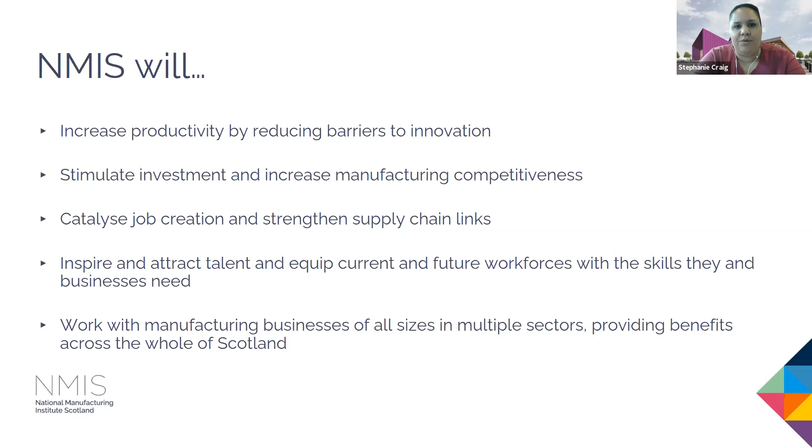NMIS as a group, I won't go into much detail about that, but we do have currently open and live two specialist centres, of which one I'm sitting in just now, the Advanced Forming Research Centre, and the Lightweight Manufacturing Centre at the Westway in Renfrew. The core elements of NMIS will involve a digital factory, a collaboration hub and a manufacturing skills academy. You can always reach out if you want any more information regarding the NMIS group.

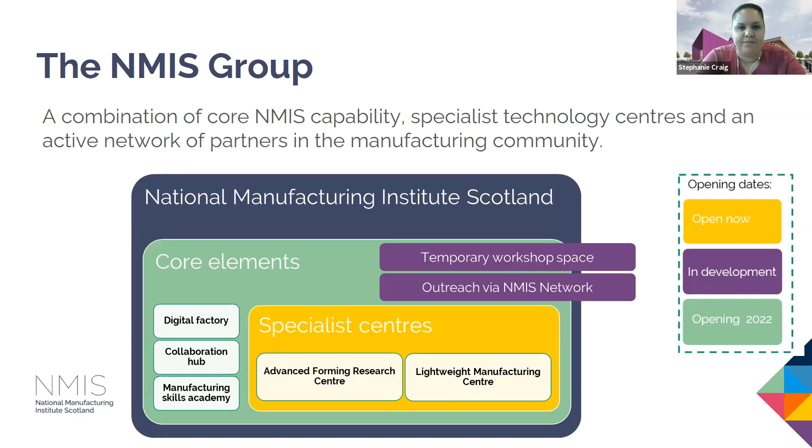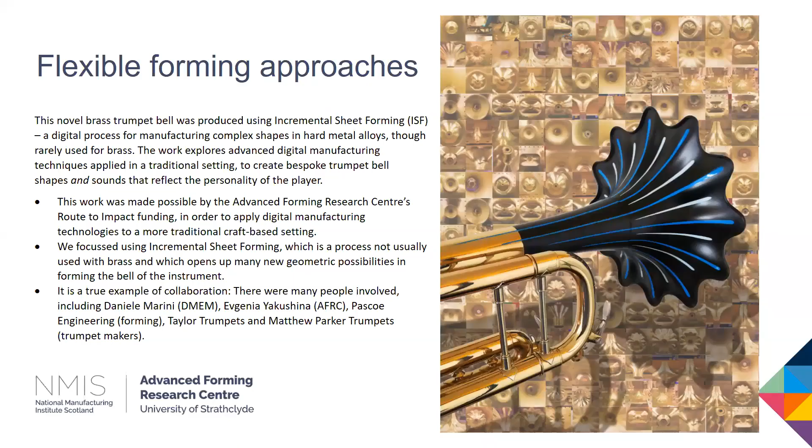If you can let me know that you can see my screen perfectly. Yes. It started from the very end. Is it the same like I see it? Yeah, you need to go back to the start. Yeah, great. That's the proper start.

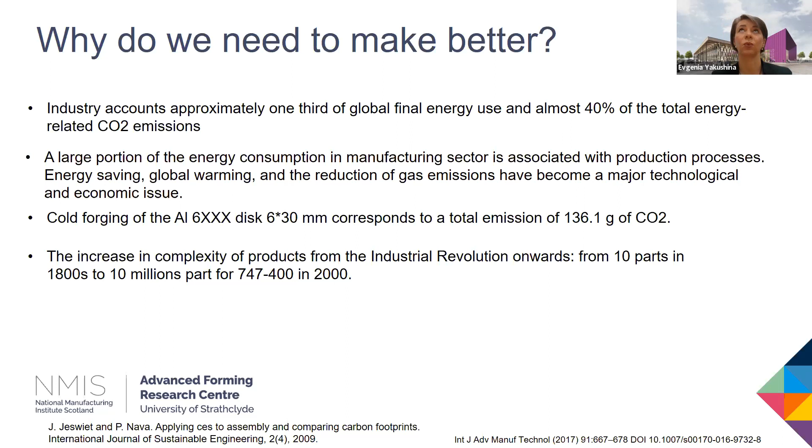And another factor, obviously speaking about the Industrial Revolution, is on the screen as well. In the 1800s, we had a musket which contained only 10 parts. In the 2000s, we've been speaking about the 747, which contains 10 million parts, and this progression keeps growing. So this is the motivation. Why do we need to make it better, and not just start, but actually do it right now?

To give you the flavor of how and what we do in the forming team to make it better: as you can see, the forming team is comprised of 4 themes, and we cover a really broad range and variety of forming processes. This relates to hot or cold sheet forming. Obviously, tribology, coating, and friction questions are considered as well. And the most efficient procedure is process modeling.

With regards to the particular steps, we work in very different strategies and directions. Either it is improvements of the current manufacturing process, which will then be embedded into supply chain effectiveness, or in parallel we explore new opportunities from innovation. And this brings us to the next level: how we can link state-of-the-art manufacturing technologies to business challenges and product challenges.

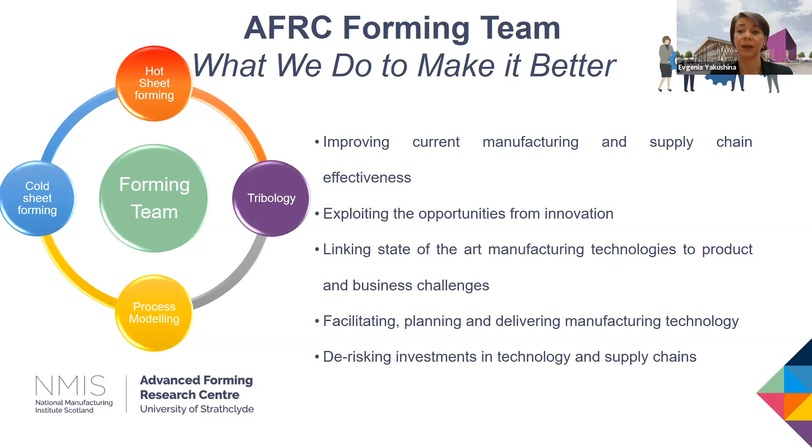Through that, we are facilitating, planning and delivering manufacturing technology. But the very last and very important step is how we can de-risk investments in the technology and how it could be implemented into the supply chain. So the next question, starting from why and what, is how we can make it better. That's a quite developed, very classical, but very proven scheme, I would say.

First of all, it is understanding the material. There are different types of inquiries coming from customers. Either they would like to optimize the current products and current material, or implement a new one, or nowadays they are all asking how they can have a stronger material or make their part lighter. So all this brings us to the very first stage, where the material is characterized and this information is embedded into finite element modeling.

But we always say we need to understand the requirements for your tool and process. We have a brilliant example where a customer came to us with a hot forming inquiry and said, I would like to form this part at the highest temperature and I will have brilliant formability. That's right, but what is going to happen with your tool? After 100 parts, the tool will deteriorate and you will need another expensive one, manufactured from the very beginning. So this is where we say we need to bring understanding to you about the tool and the manufacturing process.

And the final stage is optimization. When you're clear about your material selection, when you know what is your tool and how you can optimize, and what will be your process, that's a brilliant opportunity through modeling and different assessment exercises to optimize it. That's where we could either walk through the line with our manufacturing engineers and pick up every single stage which could be optimized or which needs to be validated, or where the quality needs to be improved. And in parallel, we could assess what other alternative manufacturing options could make it better.

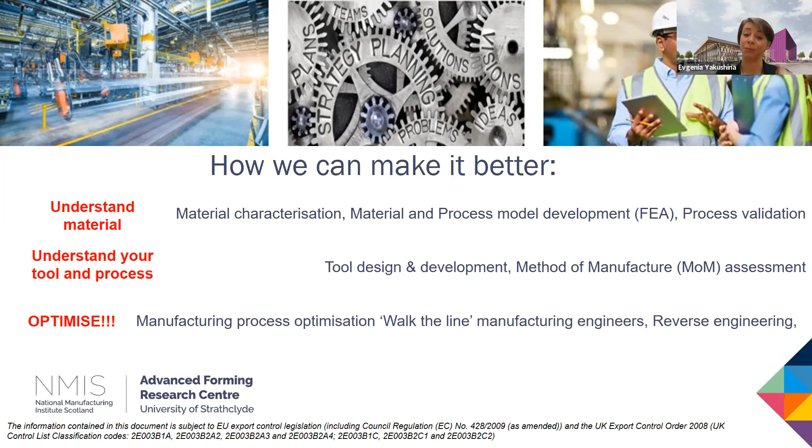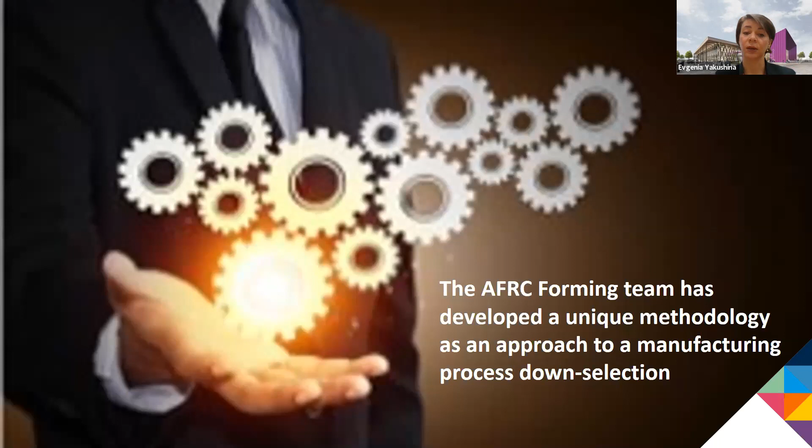Another very important part of my presentation will be dedicated to the unique methodology that has been developed in the forming team of the Advanced Forming Research Center. It is actually about manufacturing process down selection. On the next slide, you can see it's very simplified, but I like when simple templates and concepts bring it up to attention, because it leads us to start from very good questions and then dig it out to the very fine level required by the customers or by the challenge itself.

So for us, it doesn't matter where we need to start. Some customers come to us with brilliant ideas and say, this is the sketch of the part which I would like you to develop the full manufacturing process for, and it will be a turnkey solution. That's fine. Either it's an inquiry that I would like a new design of the part, so it's either part optimization, or you've got new features and then thinking about the process that could manufacture this advanced design.

Or the nowadays requirement is a stronger material. I would like that material to be stronger. I would like that material to be formable at the same time and lighter. That's a brilliant combination, which is really challenging from the material science point of view. But all this actually targets one question: how we can develop the optimized manufacturing technology and make the overall concept better. The process is named methods of manufacture assessment.

So there are 5 main steps which need to be undertaken on the high level, which actually bring you to the stage where you will understand what is the optimal manufacturing process parameters and how we can achieve it. So let me guide you through these stages.

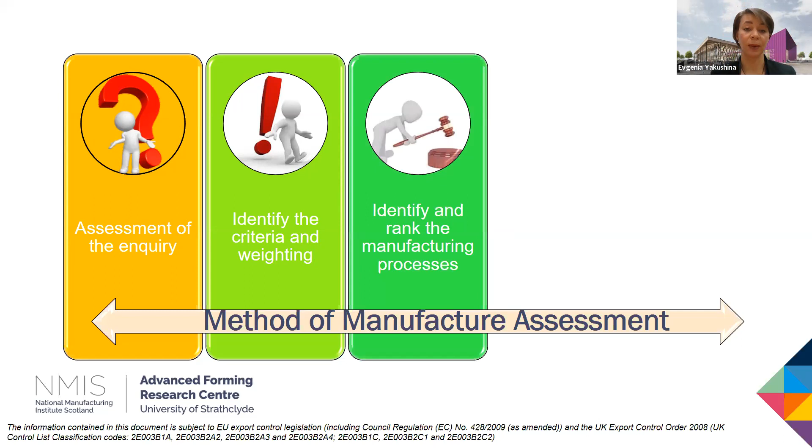And then from the whole variety, from the selection of manufacturing processes, we can rank them and identify who will be the champion. Usually we are selecting 2 or 3 of them and saying these are the viable options, taking into account your criteria, the weighting parameters, and the material that has been down selected.

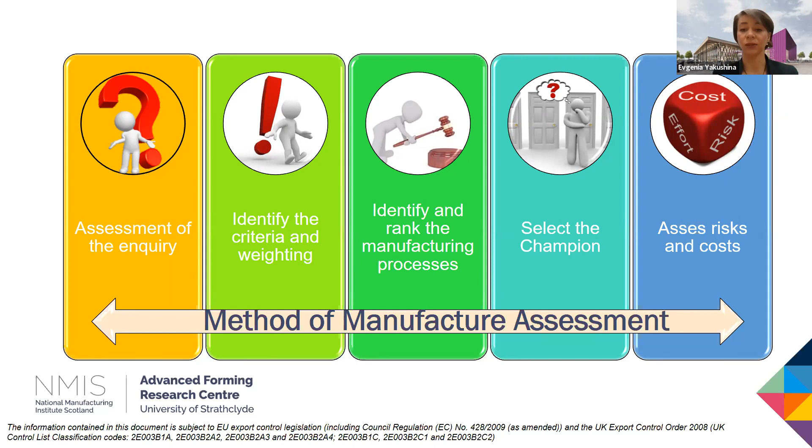And the final and very important step is assessment of the risk, cost, and effort. Because actually the manufacturing technology could be brilliant—it will form the part ideally, the quality of the part will be consistent—but the cost of the part will be the criteria that wouldn't let you go for this option, for this manufacturing route. And therefore, the final stage actually tells you that if you're going for the optimized manufacturing procedure, such and such, you need to manufacture 1,000 pounds in the month. Otherwise, the part will be almost like the cost of gold.

And that's very important—to understand all these risks, costs, and effort which will be required from the customer or from the supply chain that needs to support the manufacturing process.

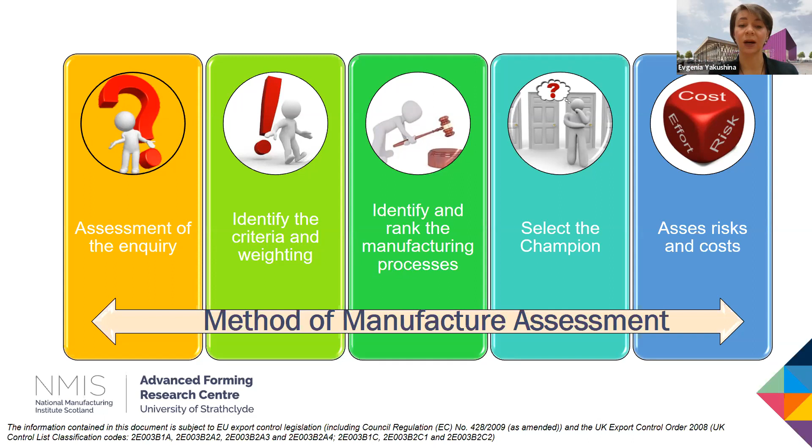So this was the theoretical introduction part, but let me show you on the case studies how we are doing this, how we are making it better.

The next few case studies will be from our very own tier 1 partner, Rolls-Royce. We've been working on a very resource-requiring process, the superplastic forming. It is known that this process is used to manufacture hollow wide-chord fan blades, particularly for aerospace jet engines. And it's not a secret that it is long, hot, and expensive.

Rolls-Royce came to us with an inquiry about whether there are any opportunities to optimize this process. Either we need to put another SPF press in order to increase manufacturing capabilities, or there are other ways.

So what AFRC did was work on extensive data mining of many years of Rolls-Royce manufacturing data. We went through all the data analysis implemented at the Rolls-Royce manufacturing facilities, then analyzed the SPF cycles across multiple stages, going through every single step of the process, and then developed novel temperature measurement instruments.

At the end, we have a brilliant achievement. The direct result of the project was that a new SPF inflation curve with a 27% reduction in cycle time was identified, and it was validated in production trials at the Rolls-Royce facilities. That was a very good result.

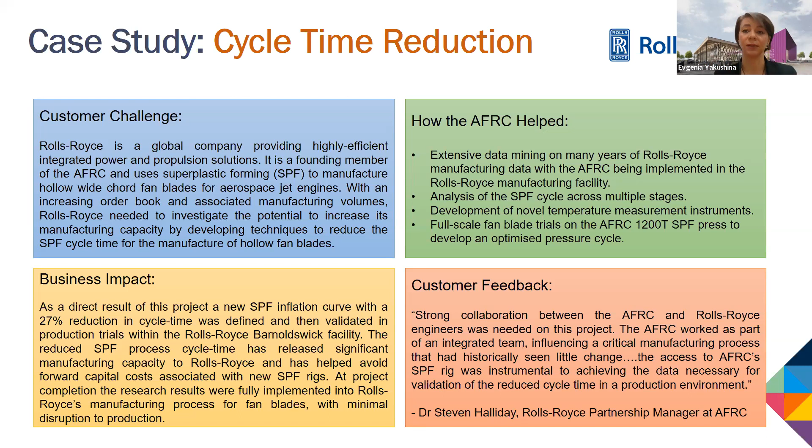The next example is again about how we make it better for Rolls-Royce, and that's about another side of the SPF process. Obviously protection coating is a must, and boron nitride is a water-based coating commonly used to provide lubrication for superplastic forming processes. Usually it's applied manually, and you can imagine the variability depending on the operator, on the humidity condition, how much is applied, and so on.

And what does that mean? This variability influences part quality and die wear, and sometimes it could even require die refurbishing and part post-processing as well.

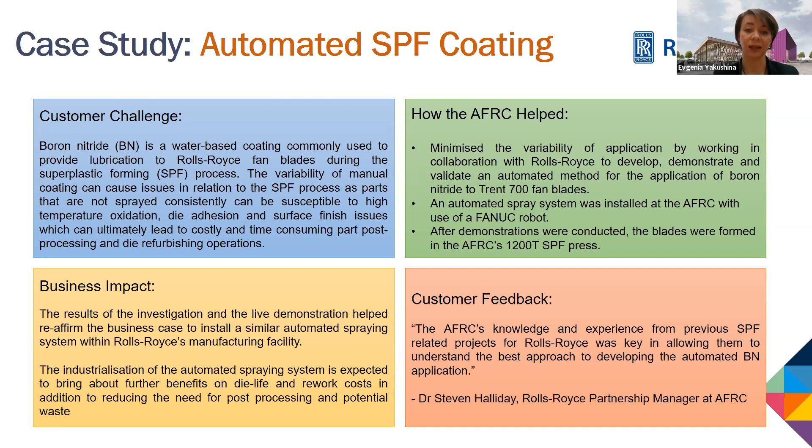Therefore, Rolls-Royce came to us and asked how it could be optimized, how we can make the quality better and more systematic. Engineers at AFRC developed automated spraying facilities, very delicate and efficient at the same time, which allow us to improve die life, reduce costs, eliminate the need for post-processing and potential waste of material, and let the dies, which are a substantial cost for SPF tooling, live longer. Brilliant results—Rolls-Royce was happy, and so are we.

Hydroforming is the technology I'll be talking about for the next couple of slides, and again it was a brilliant example performed in cooperation with Rolls-Royce. Hydroforming is a manufacturing process where high-pressure hydraulic fluid is used to form the material, and it is usually applied for manufacturing and forming low-strength steel and alloy parts.

But what was the challenge that Rolls-Royce put in front of us? It was how we can challenge hydroforming technology versus superplastic forming—whether there are economical and financial benefits, and how it could be used for forming complex shape parts. So what we did at AFRC, at the first stage, was go through the cost modeling technique, one of the services explored in the forming team.

The modeling technique compared hydroforming against existing methods of manufacturing. As soon as that was proved, we went for material characterization data and then generated the finite element model.

As soon as the model was developed to represent the hydroforming process, we aimed to manufacture the parts and go for trials. This helped us validate the model and the physical process that had been carried out, and we were able to produce defect-free parts with challenging geometry features and form. So that was the whole process, starting from the simple question: can this forming technology actually be used as an alternative?

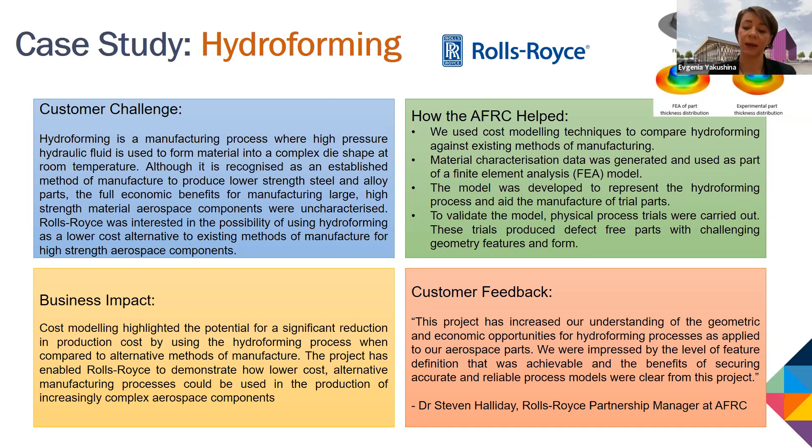So can we make the technology better to manufacture complex shape parts? The next example is again about hydroforming, but another overview. We've been speaking about strong parts, but customers are now driven by a buzzword, which is lightweighting. So we start looking at whether this technology can actually support lightweight materials.

We've been working on the hydroforming of magnesium, and it proved that it could be called a cost-saving technology. In this study, the cost comparison showed up to 40% cost savings could be made to produce these complex shape components. The picture on the left-hand side shows a component comprising a lot of features and radii in the central area, and it was perfectly formed, damage-free, with quite satisfactory quality. Again, it was a way to show how we can improve things compared to a very resource-requiring technology from the point of view of hydroforming.

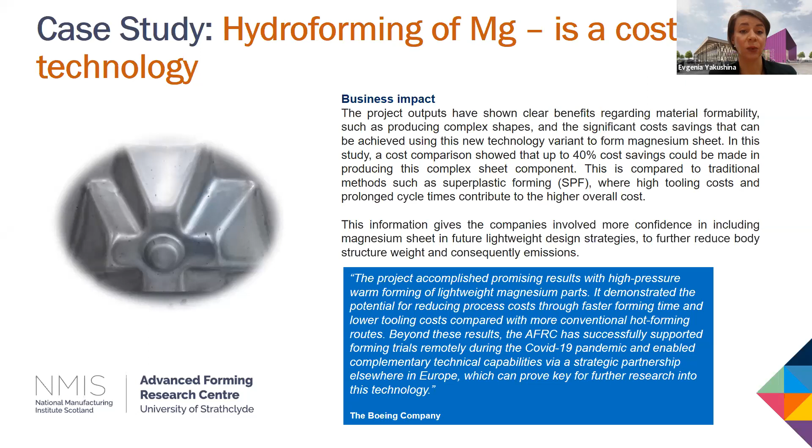This case study proves that the design developed through CFD analysis can convert up to 80% of the river's energy to electricity, and it's anywhere between 10 kilowatts and 1 megawatt. To give you a feeling, the solar panels we have on our roofs produce about 4 kilowatts, so that's a quite highly efficient process.

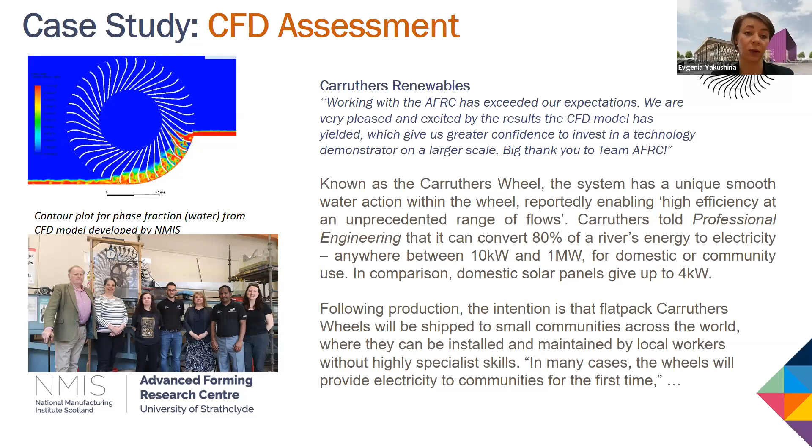Another advantage is the simplicity of the design. The dimensions of these constructions allow simple local workers in small communities to install it without any highly specialist skills. So it could be a win-win solution for these types of applications.

Another approach, which is actually putting us towards flexible manufacturing, is a flexible tooling approach. That's where AFRC has been working in collaboration with Ford, Gestamp, and other SME companies. The idea is how the same part made of different materials could be formed in a single tool, and that's the representation of the scheme showing how the concept could be developed.

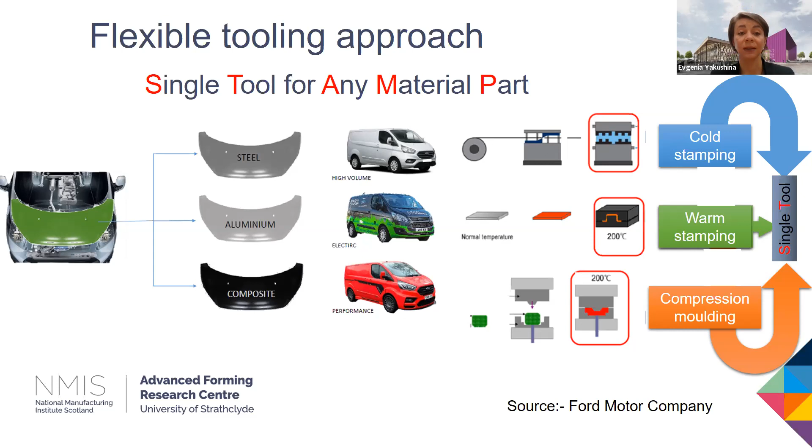The last couple of slides will be dedicated to a process that's very flexible, innovative, and still largely unknown: incremental sheet forming. This case study challenges cold forming versus hot forming - can you cold form titanium? The answer that the AFRC team gave was yes. We actually formed titanium parts at room temperature with an overall forming depth of 100 millimeters, which was an absolutely amazing result for our partners.

What this gives us is it helps shorten the time to market, because ISF technology is very simple - you need a CNC machine, you need a forming tool, and that's actually it. You obviously need to develop the tool path, but that could be done by a skilled technician. Next is a reduction in production cost and energy usage, because it's done at room temperature. You don't need to spend a lot of time manufacturing complex dies. There's no material wastage and none of these parameters associated with the process. At the end, you obtain desirable parts in small series, which is sometimes a requirement depending on the application.

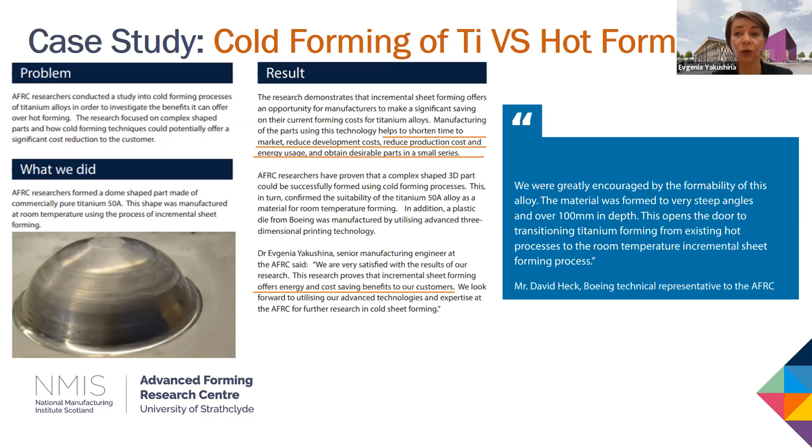Another beautiful example of how ISF could be applied for manufacturing not only aerospace components but for medical applications is a cranial implant. It's obvious that we are all different, and we have different structures of our skulls. Therefore, when unfortunately such parts like cranial implants are required, they should be individually manufactured - it couldn't be mass production, it should be tailored for the patient. Incremental sheet forming technology is exactly a process that allows you to have this flexibility.

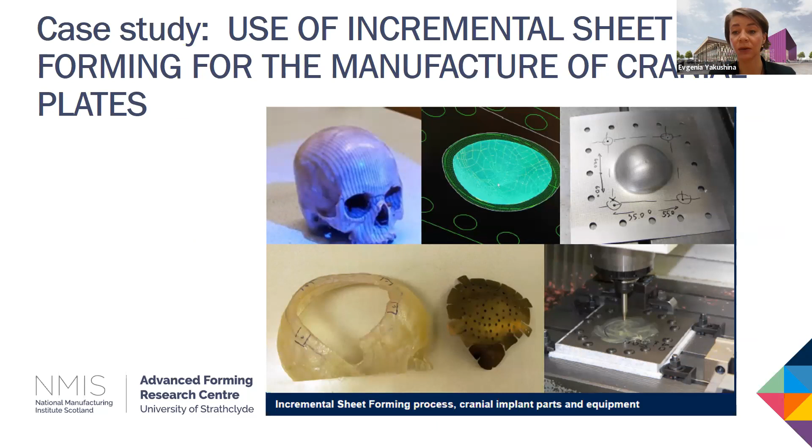The final note of my presentation is how incremental sheet forming could be applied for manufacturing musical instruments. This work has been done in collaboration with Taylor Trumpets and Matthew Parker Trumpets, who are both trumpet manufacturers. Usually the trumpet bell is a part that's manufactured manually, and you could imagine it really depends on how skillful the manufacturer is, or it's just wastage of material. The AFRC team, in collaboration with Pascoe Engineering, manufactured really fancy shaped trumpet bells, and you can see one very beautiful example on the screen.

So that's the approach for how we can make different manufacturing technologies applicable for a really broad range of components, whether aerospace, medical, or even musical applications.

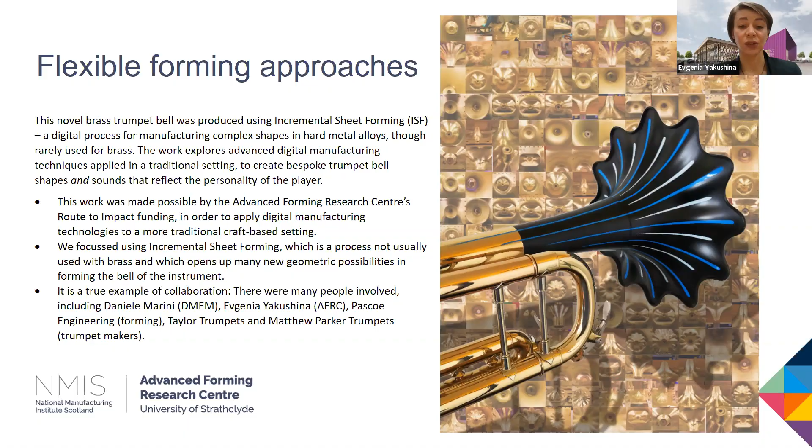And to finalize my presentation for today, a very quick slide on our vision and development plan. You've heard this word from me quite a lot today: lightweighting. We are working on how we can develop hybrid lightweight materials, and how we can make the forming technologies flexible to make it better.

Resilient UK manufacturing: the hot forming technologies, which will be on the market anyway, will be associated with oxidation, and we are working on the development of structures to optimize this.

Taking into account that new manufacturing processes are complex, we are manufacturing complex shaped parts. Tested methodologies, which give us a classical representation of material data, don't always fully answer questions of material applicability for forming strategies. Therefore, we need to maintain the same pace of development in testing technologies as in manufacturing. And the last one, but not least, net zero resource-efficient manufacturing.

That's where we are speaking about hybrid processes - resource-efficient manufacturing for high strength materials, which is a requirement. We need high strength, and we are working at the highest temperatures. And obviously, if we are speaking about the hot forming process, how alternatively we can make the heating better. That's me for today, thank you very much for your attention.

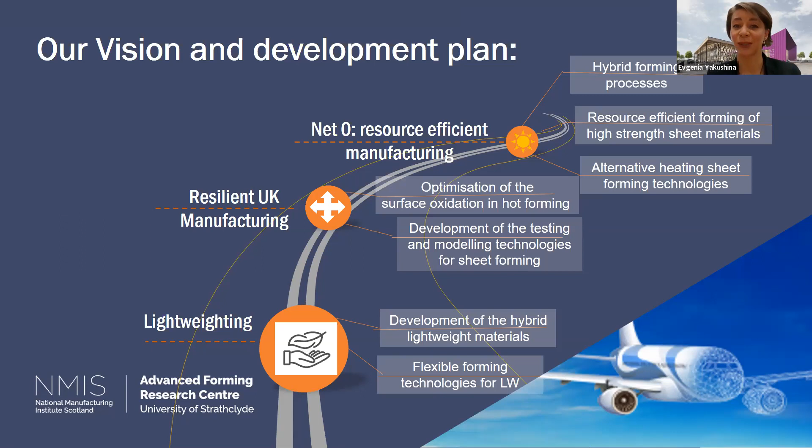Thanks, Evgenia. Hi everyone, my name is May Hicks. I'm going to give you an overview of incremental forming of metals at the AFRC. I sit within the Forging and Incremental Technologies team, which is very much complementary to Evgenia's team and the work that they do in the forming team.

We cover all aspects of forging and incremental forming, which covers both bulk and plate material forms. In terms of the processes within our remit, we've got 5 primary technologies in near net shape forming, which is flow, shear and spin forming, rotary forging, and radial forging.

Within this, we cover a range of different material applications, including but not limited to those on screen now: steels, nickel alloys, aluminium, titanium and coppers. We also work with development alloys and new alloy applications. These technologies are very much cross-sectoral, with applications in automotive, aerospace, energy, and oil and gas, as well as others. We support a number of SME partners within the UK and abroad, as well as OEMs.

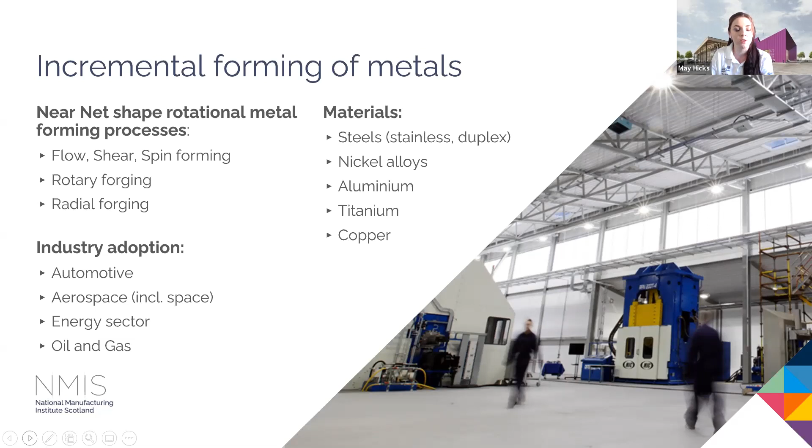Just to give an overview of some of the technologies: in flow and shear forming, the aim is to create near net shaped surfaces with optimum use of input material. We've got two primary machines within the AFRC at NMIS where we perform these technologies. In lieu of a visit around our shop floor, here's some video footage showing the processes in action. On the left here, this is flow forming.

In flow forming, we're starting from a forged and machined preform. This is a bulk forming process, it's cold, with no heat added other than that induced by friction. We've got 3 rollers here which are incrementally deforming the material, so the contact point is continuously shifting. This means the material is plasticizing, allowed to flow, and we can achieve high deformations with much lower forming forces than conventional methods.

In this process, we can achieve upwards of 200% elongation on cylindrical forms, with anywhere between 20 and 80% reduction in thickness. A key benefit compared to machining, for example a shaft type structure from solid, is that there's a huge amount of material wastage in machining. In this process, you can get much nearer net shape. Many of the dimensional features can be left as formed, as can the surface condition, which is equivalent or better than machining in many cases.

A key benefit of these types of technologies is that they are well suited to difficult to form materials that normally require heating or very high forming forces. Because of that incremental mechanism, it can lend itself well to these difficult to form alloys.

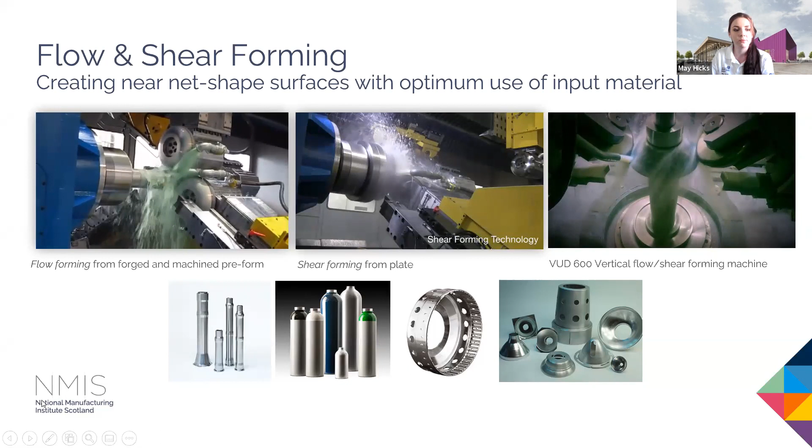So again, we're getting that reduced requirement for force, forming at much lower forming forces, but able to create much more complex features. We've also got the flexibility of the 45-degree nutation, where we can create as severe a deformation as a 90-degree flange, cold formed onto a tube structure, which would conventionally be, for example, welded onto a standard tube part. So much like some of the other technologies, we're reducing the number of parts required, reducing post-processing steps, and able to create near net shape in a single input.

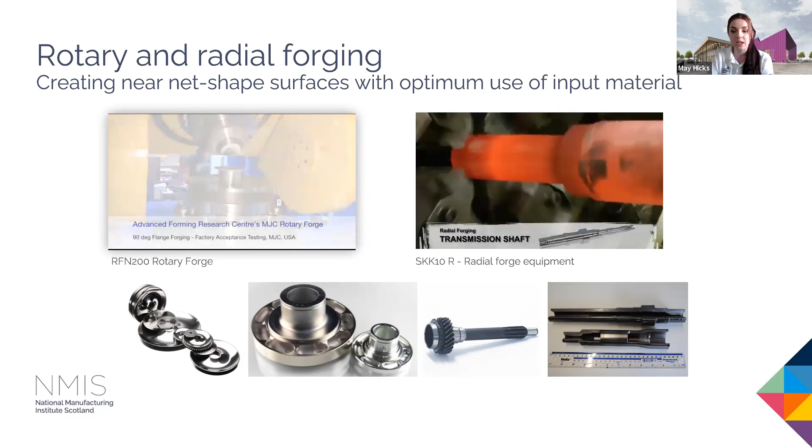It can achieve very severe levels of deformation and elongation. It's got inline induction heating within this cell, so it really does offer a turnkey solution from input billet through to forged part. A key advantage of this particular process is that you can create internal features. You can see in some of the examples there that we've got internal splines being created near net shape.

For things like transmission shafts in the automotive industry, this is hugely advantageous. The internal steps on the part are also a key advantage. You can imagine these are difficult to machine, particularly on larger components, and it is a primary advantage of radial forging.

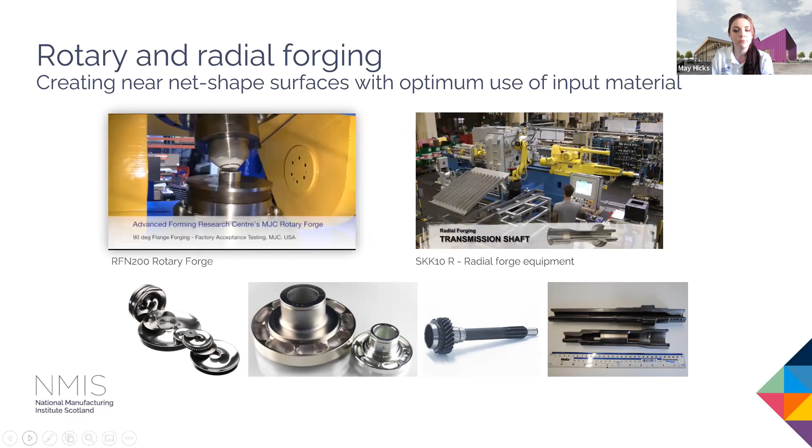In terms of the research and development work we do, how we make it better is by understanding the process first and foremost. We've spent 7 years plus in near net shape forming at the AFRC, understanding everything from raw material input and how that impacts the process, but also what the process can give us in a final part, through understanding the geometric and mechanical possibilities.

A key part of our work is to bridge that gap between design and manufacture, having enough process understanding that we can inform new part design, how to design better for these more novel technologies, and try to break that norm of inefficient legacy processes that always seem to be the baseline method to manufacture. Things like what Evgenia touched on in the method manufacture assessment, these are also where we would input the knowledge of these processes to get a more effective solution.

Just in summary, across the processes we've described this morning, they are net and near net shape processes. Material utilisation has improved up to 80% compared to forging and machining operations. It is a chipless process, so in terms of cost efficiency, it can be hugely beneficial. Mechanical properties are generally improved, and that's everything from fatigue, the hardness of the material, and also getting that grain refinement.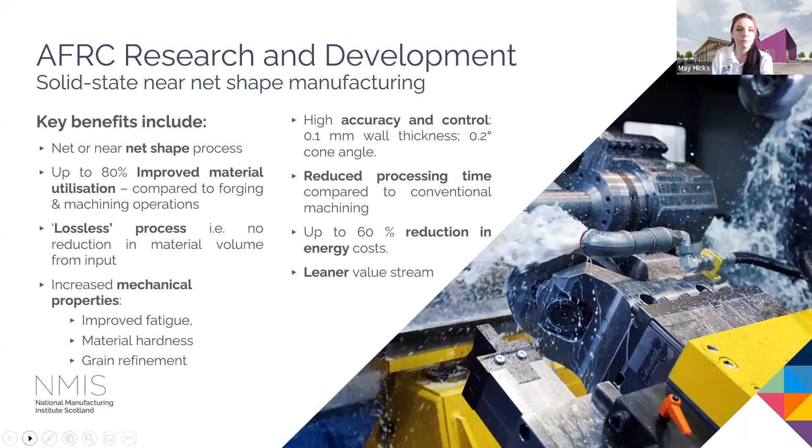And just to give a more relevant example of how this has worked in practice, that's the case study from one of our previous directly funded commercial projects between AFRC and Safran Landing Systems. The aim of this was to demonstrate flow forming as a solution for landing gear applications. So you can imagine this is quite a large scale application of this technology. These are conventionally expensive components with very high waste.

But a key driving factor for this was the long lead time. So we were looking to verify alternative routes to manufacture the landing gear, and we looked at flow forming to do that. We did a suite of experimental trials on our equipment. We have industrial scale equipment at the AFRC, but we also work very closely across a number of our projects with predominantly UK-based suppliers. That really helps with that knowledge exchange aspect from design right through to the manufacturing side as well. So in this particular example, we achieved 335% elongation from the starting preform material.

We achieved and validated the required proof strength in the material, and overall there was a predicted 50% cost reduction. Now that was based on a current part design, so this is where actually working with part designers we can improve that value proposition further by starting to design parts for the near net shape technology based on the knowledge base that we have at AFRC.

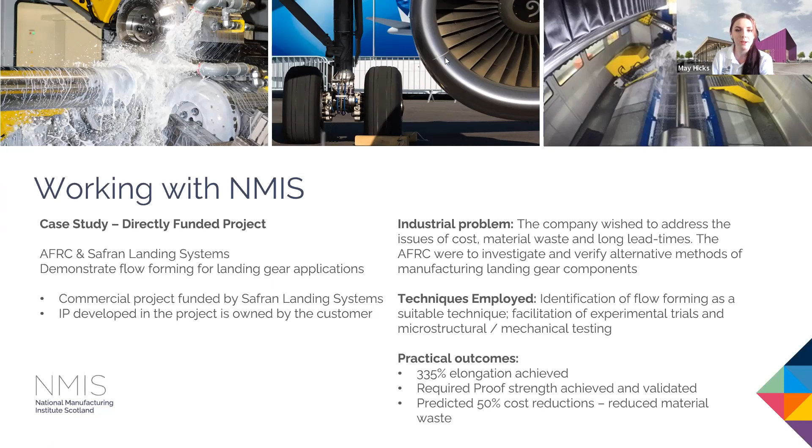That's everything from me. Thank you very much. You're on mute, Sampan. Sorry about that. Thanks, Steph.

Excellent presentation by May and Evgenia, and thank you, Stephanie, for introducing NMIS. So now we move on to another presentation from my side. I'm Sampan Seth, a senior R&D engineer in the machining and additive manufacturing team within NMIS.

So just to give you a brief background, our team within NMIS is under the digital technologies team, and we have got a mix of people with a variety of multidisciplinary skills, ranging from manufacturing engineers to R&D engineers, and people who have been in the academic environment and people who have been in the industrial environment. So it's a nice blend, and we work on a very interesting combination of technologies, which is conventional and additive manufacturing within NMIS.

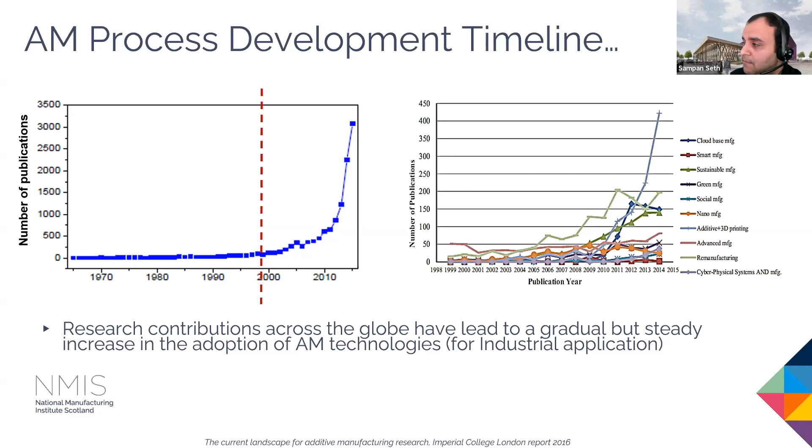And one of the important highlights of developing this technology within a conventional machining team within NMIS is to make sure that the strategic goal of NMIS matches the current industrial demands. Now, this is a very interesting slide. Additive manufacturing has been equally progressing for both metallic and non-metallic components. But one of the aspects to bear in mind has been to reduce the material waste, reduce carbon dioxide emissions, as well as improve the efficiency of the process overall. Now, we have been working on various case studies as well.

So some of the bullet points which you will see: we have been working with SMEs, local SMEs, big OEMs as well, in order to make the most use of their manufacturing production route, and making sure that the supply chain is meeting the complex customer demands as well.

So we have undertaken a few projects, and I'll touch base on one of the applications within AM. So how we have led to improvement in the supply chain, reduction in the lead time. You don't have to store a lot of feedstock material, or don't have to operate on large feedstock material. And of course, that effectively describes how cost effective your operations would be as well.

And also from a more technical point of view, as compared to conventional subtractive manufacturing technologies, how we are improving on the functional capabilities of certain components by not only enhancing their parent properties, but also providing them additional functionality if that is needed as well.

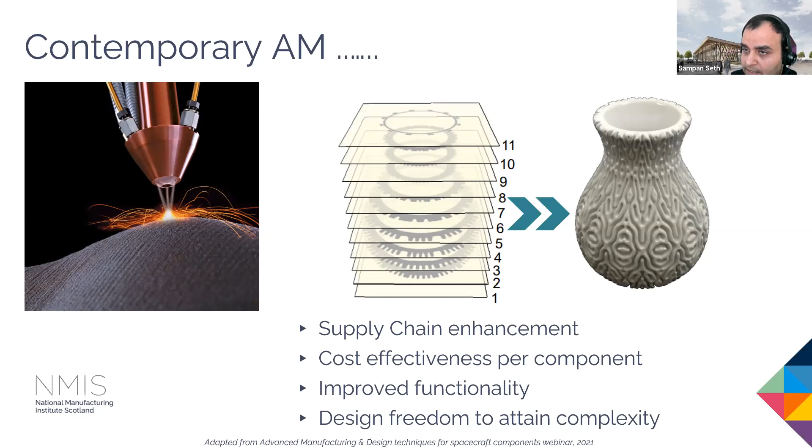And one of the key factors is that the advantage of the technology, or the beauty of the technology, lies in the fact that there is a design freedom, of course, that comes with the constraints of each process. So when we talk about system, process, material, there are design rules which are made around each of the AM technologies, and NMIS is working within our team as well. So there are design for additive manufacturing people who are working there, and we are working on improving the possibility of attaining complex design, complex use cases for industrial applications as well.

Now that brings a very interesting comparison of conventional versus advanced or additive manufacturing, especially. So there have been a lot of case studies. There are a few running projects which are ongoing within our team, and there have been projects which we have delivered, and we have tried to address one of the challenges a lot of people have questions about in the adoption of additive within their production routine: how effective the process is in terms of maintaining economics, as well as the least impact on the environment.

So just for a quick reference example, there are two approaches that we can use to fabricate this component. Either we start with conventional manufacturing using a block or an ingot of material, or we use a material based on the material compatibility, and we use the additive layer manufacturing techniques to build this up. Now there is a generic comparison that's usually made between traditional and additive manufacturing techniques, that we can have better design, we can have a more sustainable process.

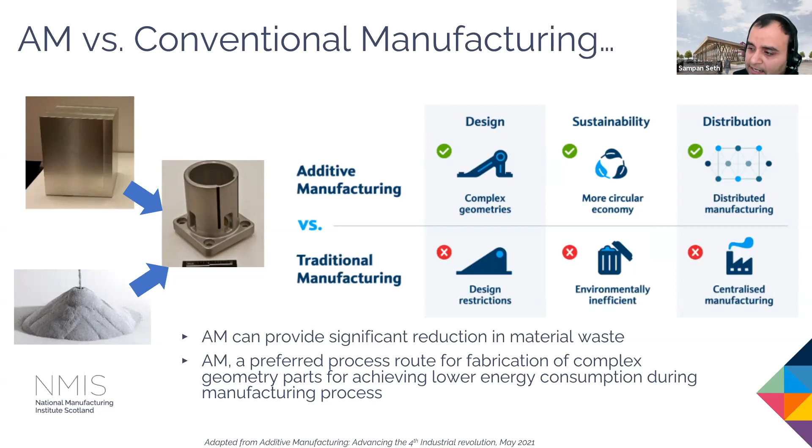And what that also brings to the OEMs as well as the SMEs is that it gives a capability of distributed manufacturing advantage over the conventional manufacturing techniques: it's not centralized, we can form parts which are more customer demand specific, rather than having a batch production which is centralized and then distributed to the customers.

Now it's equally important to highlight the fact that there has been a lot of work there, and we know from the growing market trends that additive manufacturing will have an enormous effect on the global manufacturing market, global production market as well. And from the reports, there's going to be a significant increase in the overall adoption of AM within the manufacturing market between 2025 and 2031.

And this also brings us to a very challenging point as well, in lowering the global emissions. Now, one of the important aspects to highlight within the conventional as well as the additive manufacturing processes is how energy heavy, how carbon dioxide heavy some of the processes are, and how the principles of AM are able to lower the emissions. So most of the industries which are heavy on steels, non-ferrous alloys, aluminium, plastic industries, or even the construction industry, there is a significant increase in the overall carbon dioxide emissions from the industry, and how that can be brought down by about 40%, and how AM has got potential.

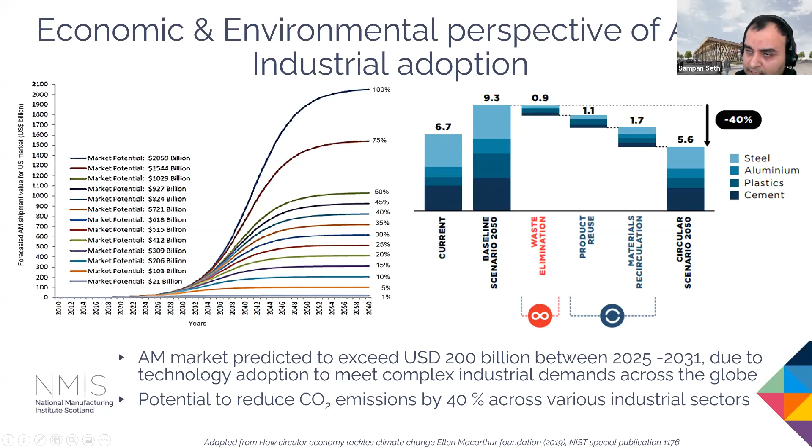Now, that is the sort of background on where I would say NMIS focuses on moving forward. And one of the important things to highlight is that we work very closely with one of our tier 2 members, Hybrid Manufacturing Technologies, and we have developed within NMIS a hybrid AM process, which is basically a combination of additive and subtractive technology, and it's a unique process that is a synergistic interaction of the conventional machining operations as well as the additive manufacturing process.

And we are currently working on various projects on that, and basically what it does is it allows a single clamping operation that will cover both subtractive as well as additive manufacturing. That means it helps a lot overall in moving equipment or moving the component workpiece around the workshop as well.

It immensely reduces the material waste, which is again one of the aspects which I touched on in previous slides, how the AM process could improve a lot in terms of feedstock waste, as well as ease of manufacturing by reducing the overall process time, as well as fabricating components which are pretty complex and even require lesser lead times as well.

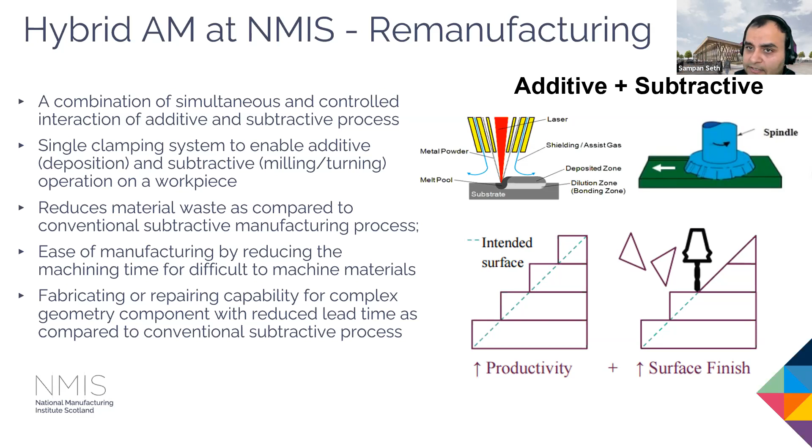Now, in terms of the case study, we did an Innovate UK project, and basically what it was is localized repair of a forging die from one of our OEM partners. And what we displayed in the project was a complete remanufacturing cycle, that we got a die which was absolutely worn. There were flash lands worn out. The cavity side was worn out as well.

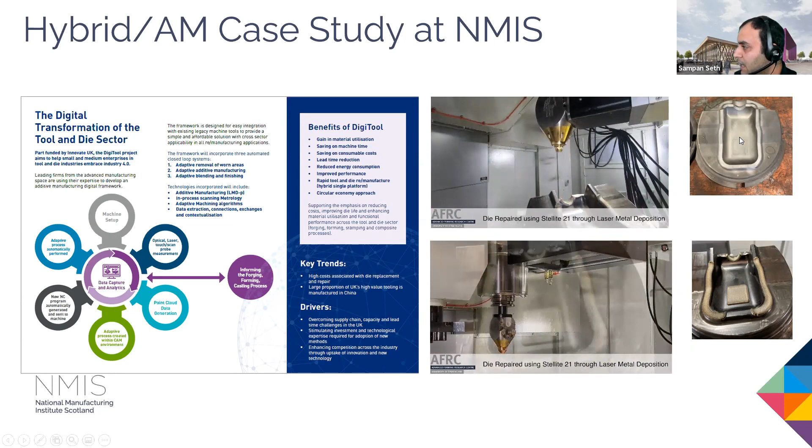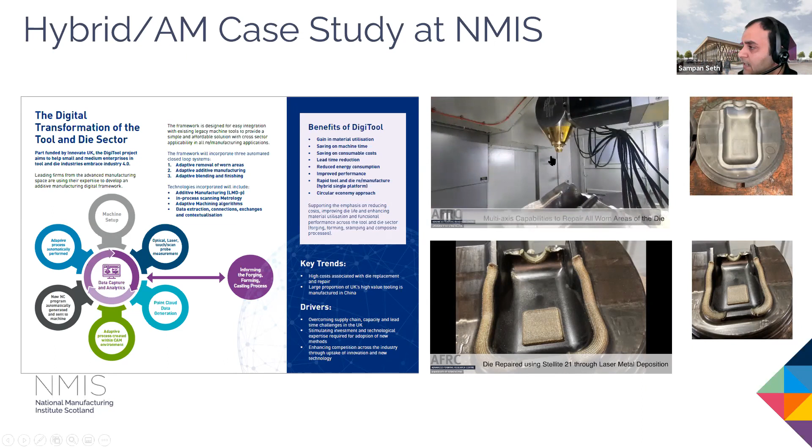So what we did was the deposition, and then the final finishing to restore the component, not only in terms of the geometric tolerance, but also improving the functional quality of the surface as well. So basically we applied a hard face coating on an existing component, which increased the service life to 108% from the parent material, and also reduced the overall CO2 footprint as well. If this was rejected, that's basically a new product altogether that needs to fit in. And that process is very efficient in terms of energy as well as cost.

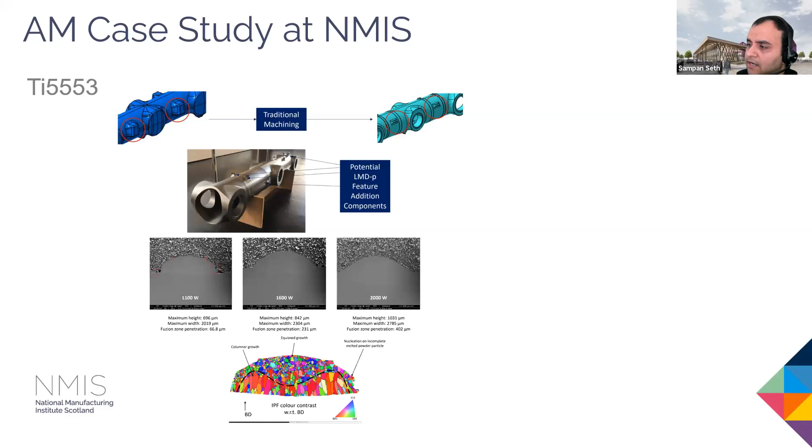The other advantage that I would want to highlight in terms of case study, that as a team we are working on, is feature addition on certain components, which again becomes quite challenging using traditional manufacturing methods. This was a PhD case study that's been concluded within our team, on one of the titanium alloys as well. So we were planning to add a feature on the existing landing gear. And what this showed is that our process is capable of adding features as well, effectively reducing a lot of machining time and improving the overall process economics, as well as an overall reduction in the carbon dioxide emission.

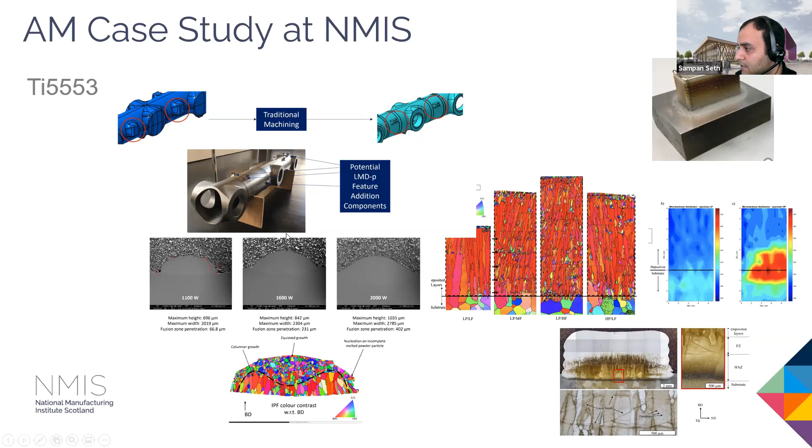Now, just to touch base on some of the important highlights of our group, and what essentially we are capable of doing within our group. We are capable of a full remanufacturing cycle, and there are a lot of projects ongoing within the group, that we take a component which is worn, we clean the component, we do reconditioning using some of the processes, so laser metal deposition that we touched on. We have got a wire arc additive manufacturing process. This is going to be a new addition, which is essentially a solid state AM process, a high pressure cold spray process, and the other one is again a solid state process of friction stir.

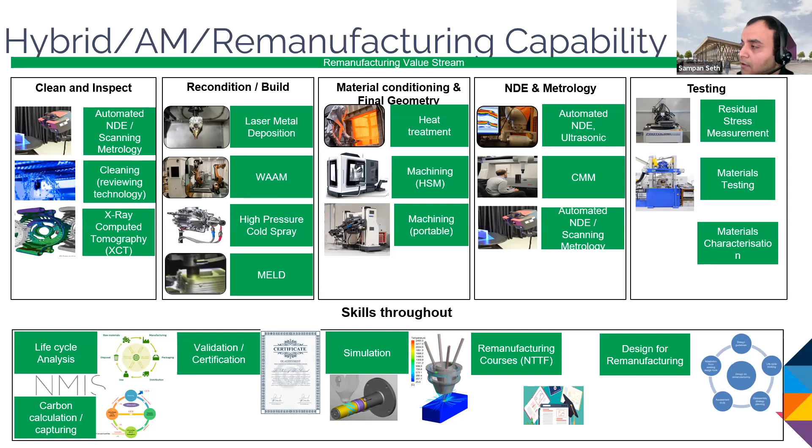So combining or using individual techniques and following the value stream of remanufacturing, we have shown the effective use of conventional manufacturing combined with additive techniques, and how cost effective and how environment friendly those processes could be. I think that will be all from my side.